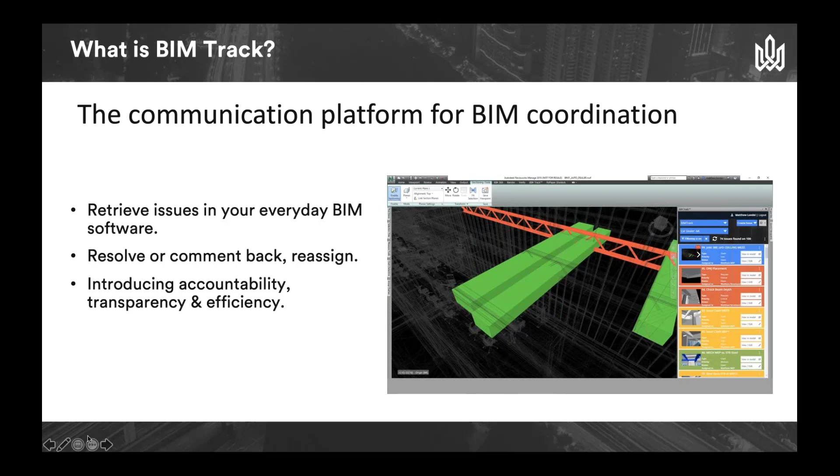BIMTrack allows you to extract and sync that information from your Revit or AutoCAD application into a Power BI interface. The idea is it allows you to connect these tools, from Navisworks to Revit to AutoCAD, Tekla - it doesn't matter what tool in the toolbox you're using. It's agnostic to any one platform and allows you to manage that communication.

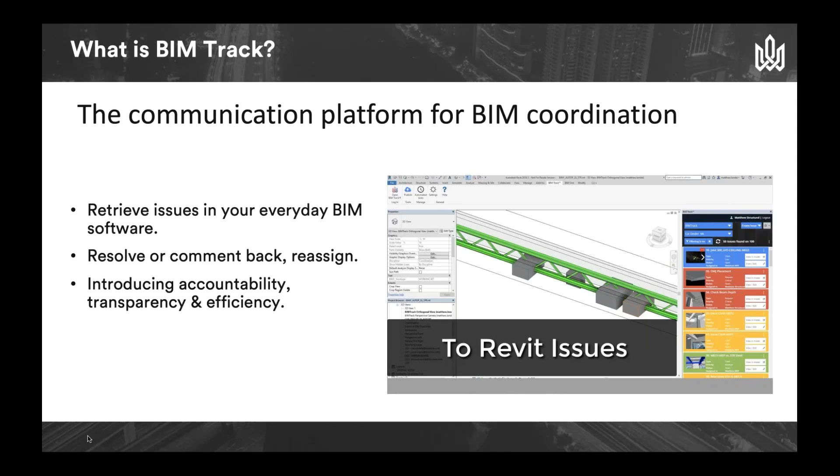Your model management workflow, whether BIM 360, SharePoint, or ProjectWise for drawing or model document management, works fluidly with BIMTrack. BIMTrack is issue management, so model management and issue management working together is a perfect workflow. A lot of the big GCs and architectural firms are using BIMTrack for that reason. I'll talk about metrics and analytics - all the information and communication you're having has attributes to it, like what phase it's in, who it's assigned to, and what zone the issue is in.

I'll show you an example here of how we can create zones within Revit and sync that out to Power BI with issues. So whenever you create an issue, you assign it to an individual, you assign that metadata, the due date.

The mantra of BIMTrack is really transparency, visibility, and accountability. What I mean by that is being able to see what trades are working on. Traditionally, the pain that BIMTrack is solving is that idea where you can't see what your subs or consultants are working on until that next meeting. With BIMTrack, it's connected into that tool, and you can see exactly the stage that people are at with the issues they're working on.

You can track performance and see all those metrics, and drill down deeper into the information. So I could say, I want to see everything that's assigned to the mechanical team based on this zone, based on these individuals, and all the ones that are overdue that the team should be working on.

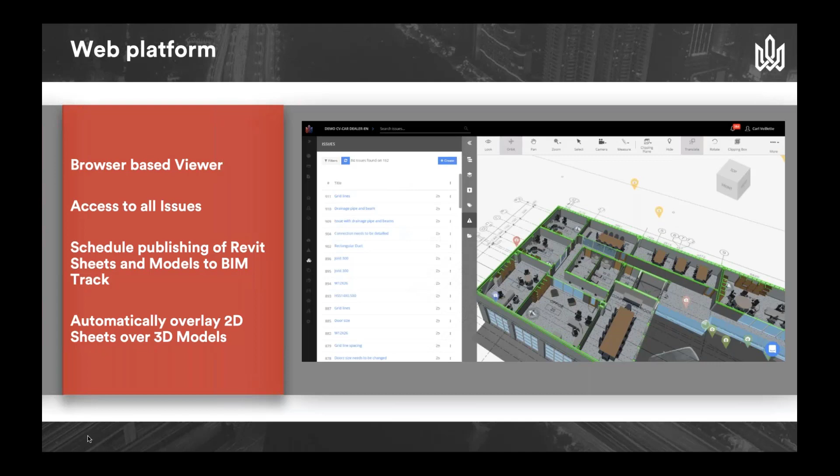As I mentioned before, add-ins, so any AutoCAD-based application platform, so Plant 3D, Civil 3D, HydroCAD, anything that consultants might be using, Revit, Tekla, Navisworks, the list goes on.

So the idea of the add-ins allows you to work in context, as we call it, inside the tool. So if you're an architect using Revit, and you're in Revit 14 hours a day working through your work, you basically have a BIMTrack dialog box open that allows you to work on the issues that are assigned to you.

And the cool thing is view in plan, view in model, navigates you through. So you can imagine inside this building, you can have saved views that will take that user right to where that issue is or that clash is within the model where they need to work on, make the design change, save to central, relinquish the typical process, put their notes in and update.

The integrations, things like Procore or Power BI that I'm going to talk about today, allow you to connect to those solutions. So we have an open API that I'm going to be showing you today that allows you to extract or sync information to and from BIMTrack, to and from Revit.

Related to what we're talking about today is Dynamo and BIMTrack. The interesting thing about Dynamo—I'm no expert myself, but once you get into this you'll see the power of it—is that it's an open API that will allow you to connect. My colleague who authored the API and works with our development team recorded a little video that I'm going to walk you through.

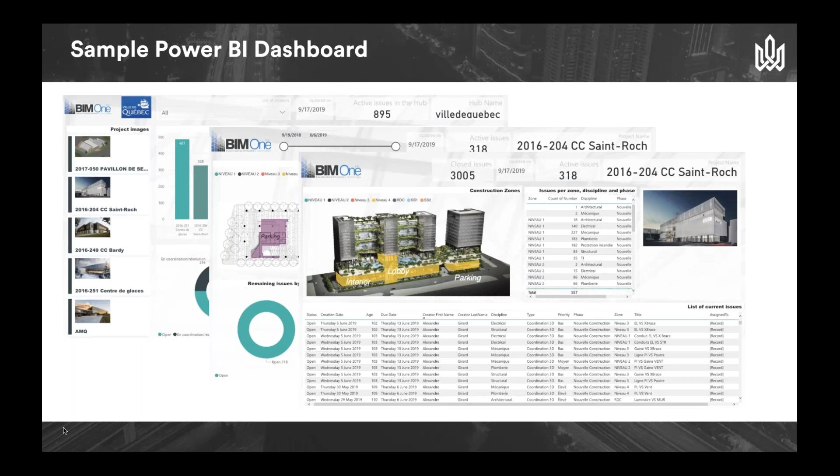Another example here is something like an isometric view, sectioned through with hotspots over the interior lobby. Here are all of the issues in the interior lobby and parking structure—who they're assigned to, what the due date is, and what team they're involved with. This is all real-time data reporting from BIMTrack into a Power BI interface.

As I mentioned, my colleague created a specific example for you, and I'm going to walk through it and share this with you—I've also got his email address for those who want to see how it's put together. He's doing this presentation for BILT Europe, coming up soon. Let me go ahead and play this.

What he's done here is create a Revit plan, and inside that plan he's created issues in all of these rooms based on zones and room numbers. You can see inside Revit the floor plan, and this is the BIMTrack dialog box running inside Revit with the issues assigned to individuals.

The colors indicate a configurable option—you can set colors based on priority, so everything red is critical, everything yellow is high, and so on. You can also set it up based on discipline—say, all architectural red and all structural yellow. It's completely up to you, a visual aid to see what issues you're working on.

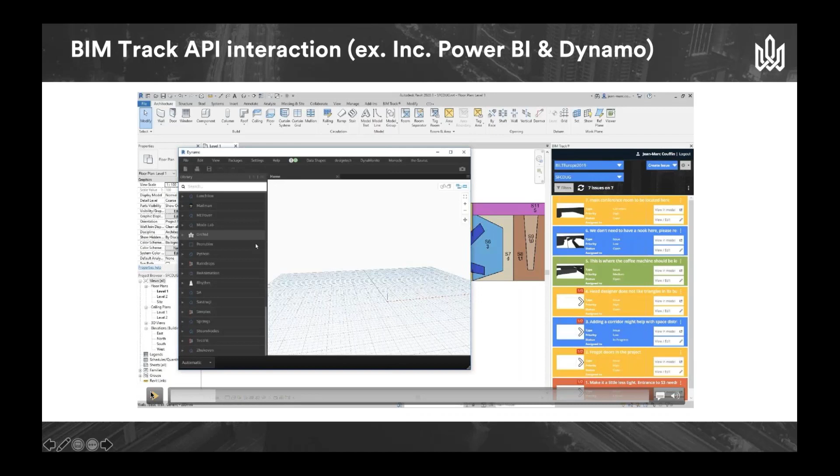The idea is that we've created a project inside Revit, set up some zones and rooms, and created issues in each one. Let's play this through. We want to identify the issues, so we're going to use Dynamo to connect into Revit to extract that information, with the purpose of feeding it and syncing it to a Power BI dashboard.

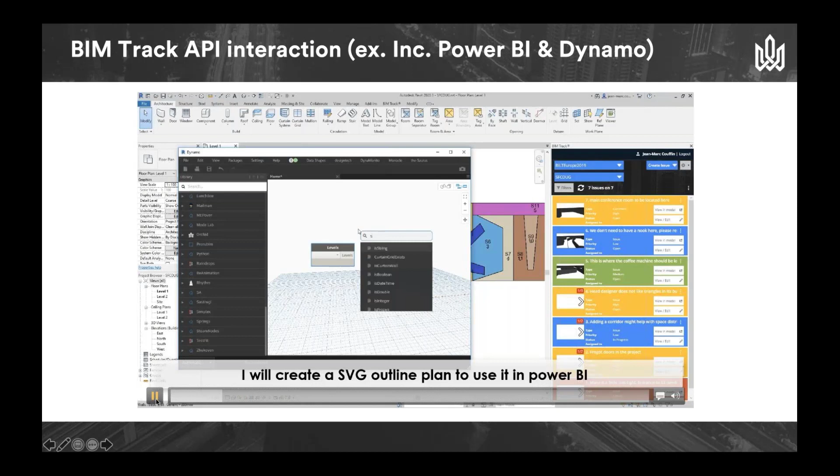So basically he's creating the Dynamo script here to connect to the levels. Going to jump over into Power BI, and I'll back that up right here.

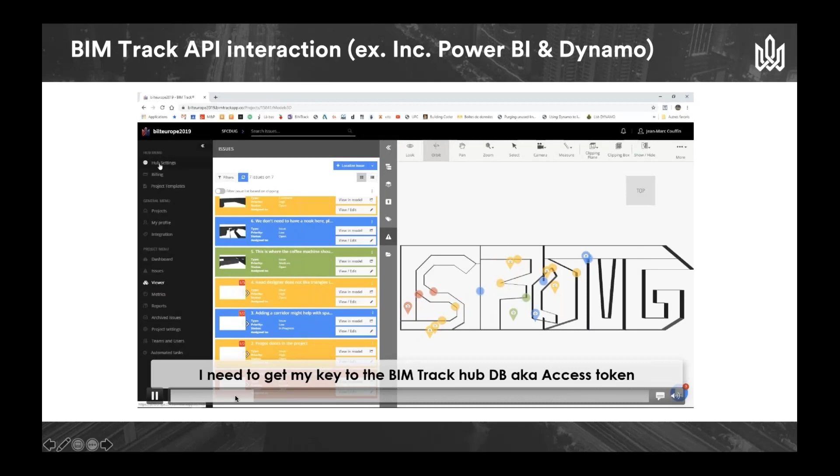We actually have a Power BI toolkit. For those of you that have interest in doing this, there's a Power BI template that we've created. The API is open and freely available to BIMTrack, so for those of you that want to play with this, I'll show you how to get access. There's a little how-to step to do this as well.

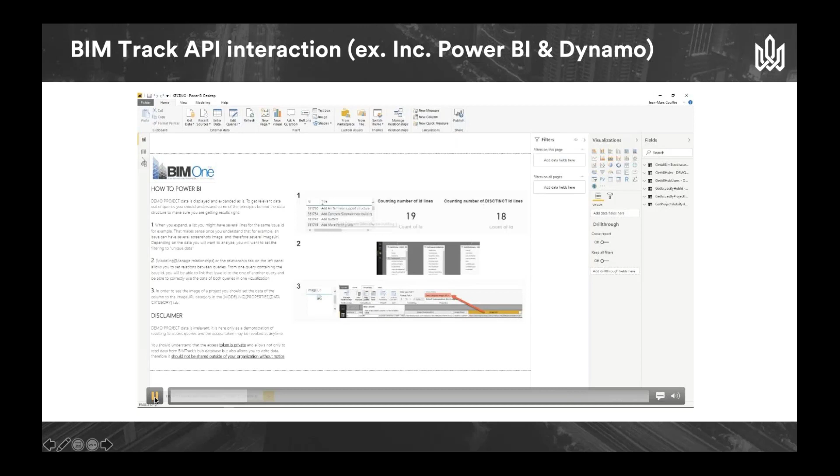So now we're inside of BIMTrack, and basically we're going to do a token request to have access to the API. You grab that, feed that information back into Power BI.

Okay, let's kind of pause there. Okay, hit the forward button.

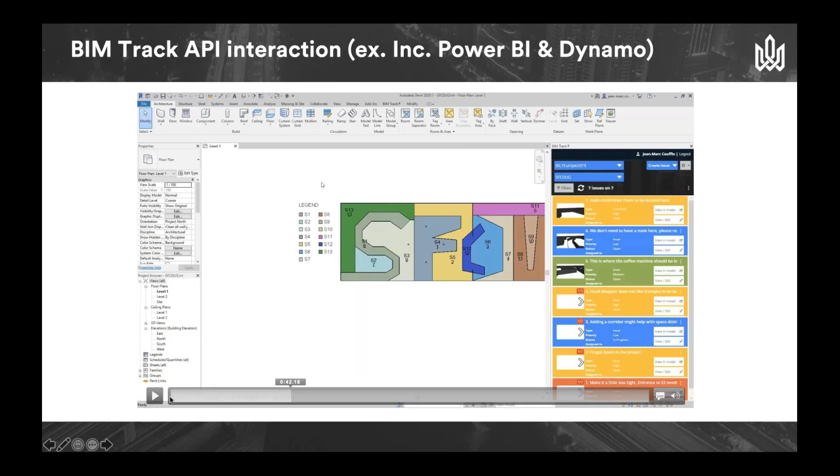So here's the API, and basically all the calls. You have access to all of the hubs, issues, and projects. So you can see here all the kind of call sets.

We told him to try and make this 2 minutes, so he fast forwarded through here, so it's going to go really quick and I'll just mention - basically he's going through the levels and rooms to be able to call that and feed it into Power BI, fast forwarding through it here.

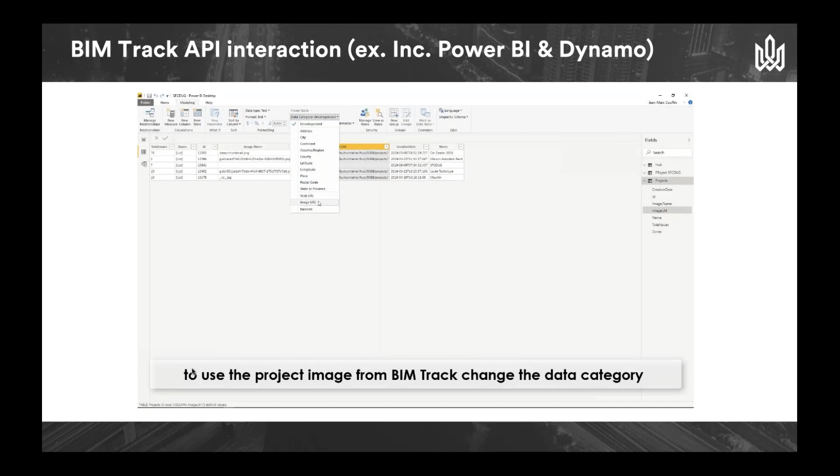Back to Power BI, basically creating the layout of this. Most of the work with creating the Power BI dashboard is not really the connection - the connection is actually pretty easy. It's how do you want the screen to lay out, like I was showing you before with those floor plans and hotspots and things like that. It's usually conversations within your team about how you want that to look that takes the most time. The connection and the layout of it is pretty simple.

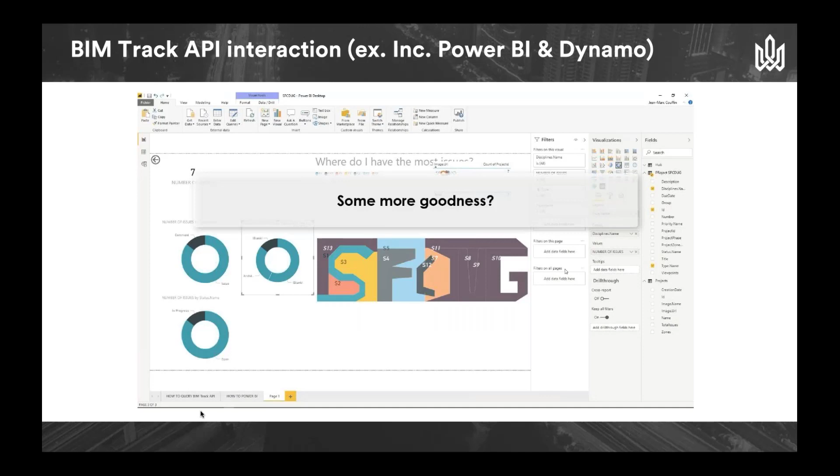But here, basically, there's the Revit floor plan. He's brought in a vector screenshot of that inside of Power BI, and he's creating basically all the connections here between the issues.

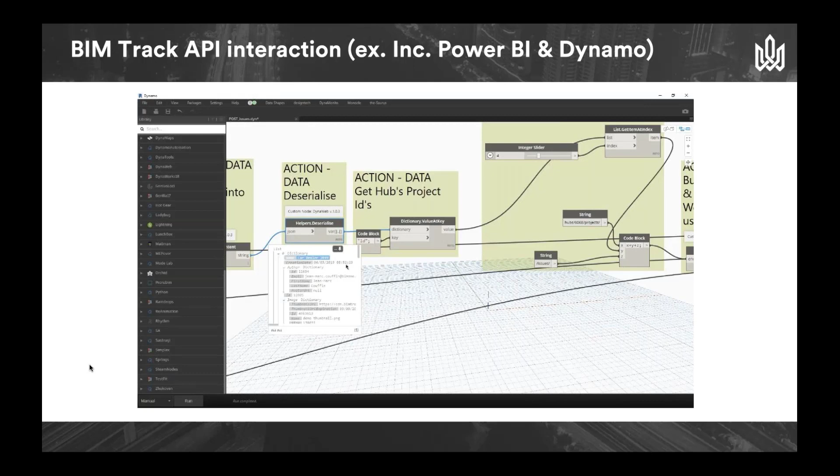We'll make this presentation available after this, so if you want to go back through this, pause it and go through these steps.

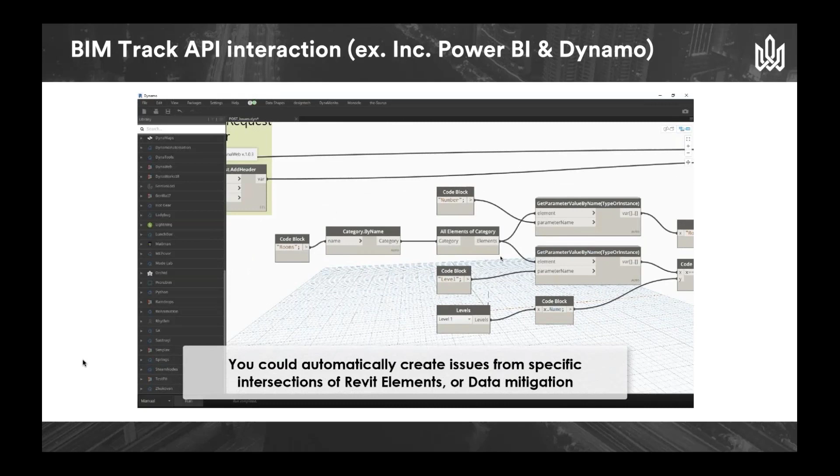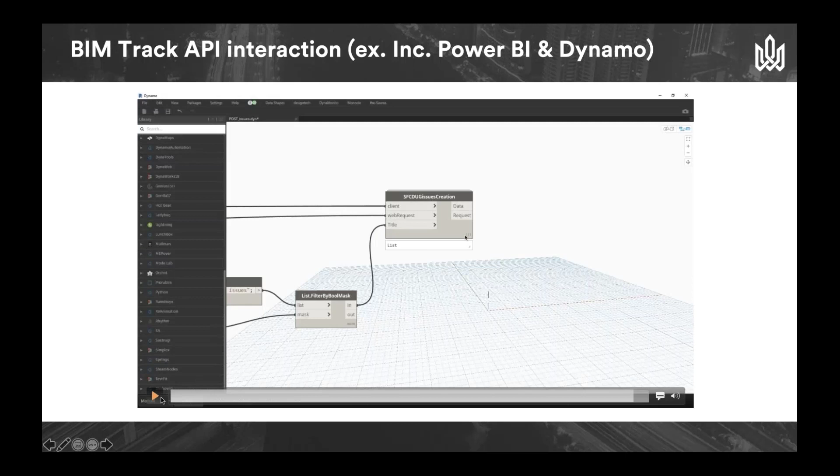And that's basically it. I think that was kind of the end there, right? He was just doing the connection there.

So the idea there is basically just using Dynamo to automate that process, to be able to extract it and also sync it from BIMTrack back into Revit - that's the power of Dynamo. But the example here with Power BI is creating that dashboard that you can share that information out with folks who don't normally have access to that data.

And so that's pretty much it, just wanted a quick little overview of that. My contact information is here. Jean-Marc Couffin is the API developer behind this, and I've included his contact here.

I know he's involved with some of the folks in this group, with some communication with them. He's on the forums as well, feel free to reach out to him - he's the expert on this, so if you have any more technical detailed questions, feel free to reach out to him, or you can contact me and we can set up a call with one of our developers to help out. But again, this is an open API and freely available to allow folks to have access to it.

Okay, any questions, or should we just kind of keep moving along? Yep, we can keep going on. Let's see if there's any questions online - does anyone have any questions?

Is it an Autodesk program? It's not, it's a no - we're a separate company, but we integrate with all the Autodesk tools. We're part of the ADN.

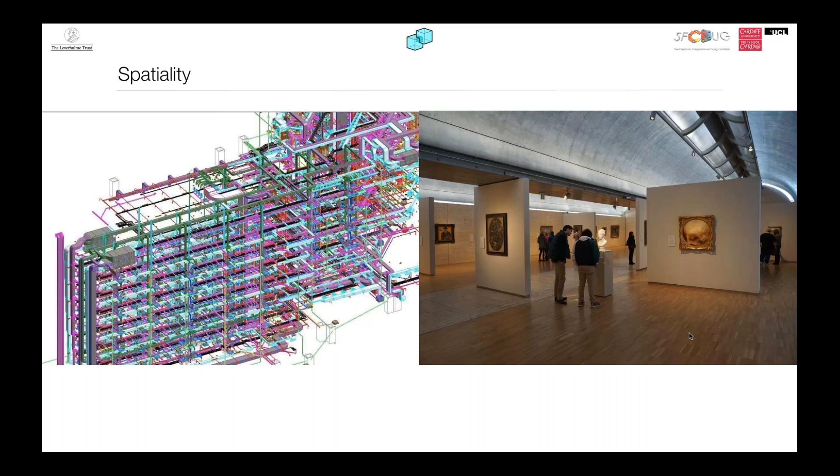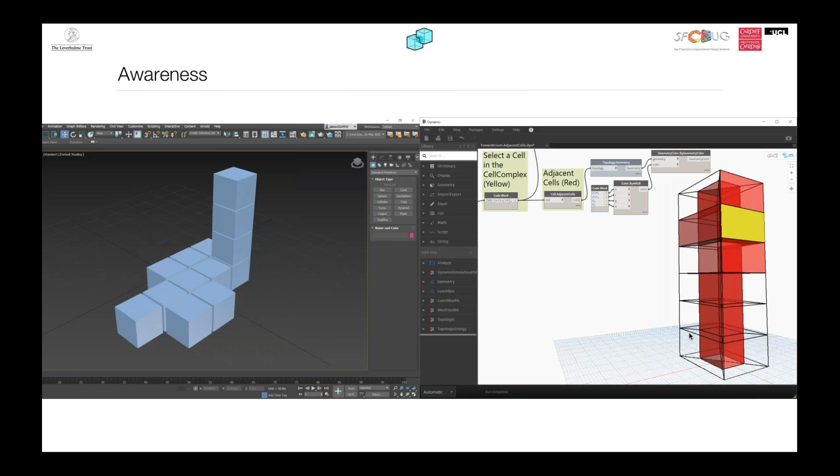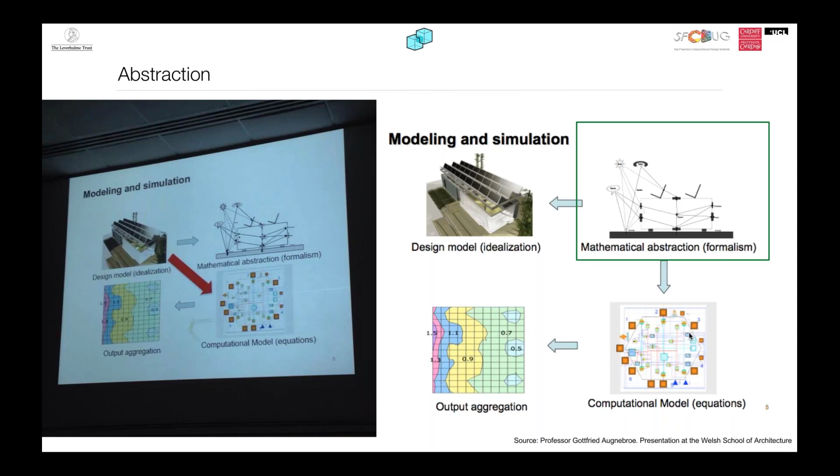So what we want to do is flip the arrow. We don't want to go from BIM to Topologic. We want you to go from Topologic to BIM. But I fully understand that many people have BIM models and they would like to move them to Topologic, and we have some tools to do that. I'll show the work that we've been doing with Buro Happold in particular on that.

The other main idea in Topologic is that if you are aggregating space, you can get into trouble if surfaces do not meet, and you can get duplicate vertices. Sorry, if the sound can be lowered just a little bit. So if you aggregate space, you're going to get these kind of duplicate vertices when you should be doing only one vertex. So Topologic uses the idea of division: you take an overall space and you slice it with planes to create your zones, to create subspaces.

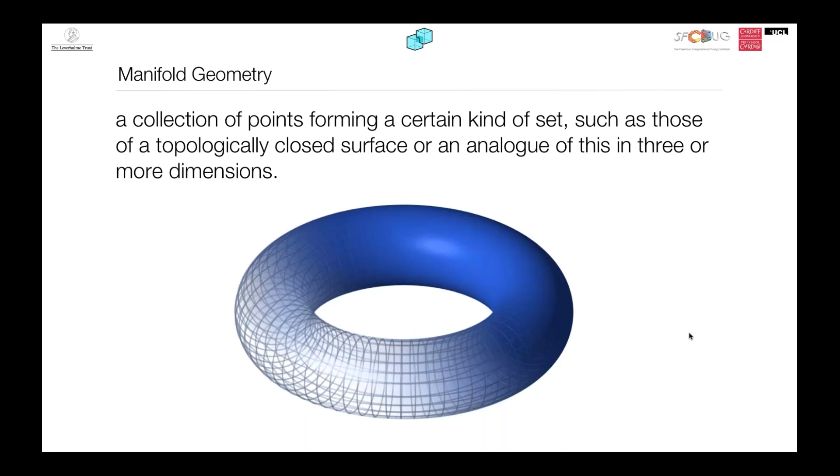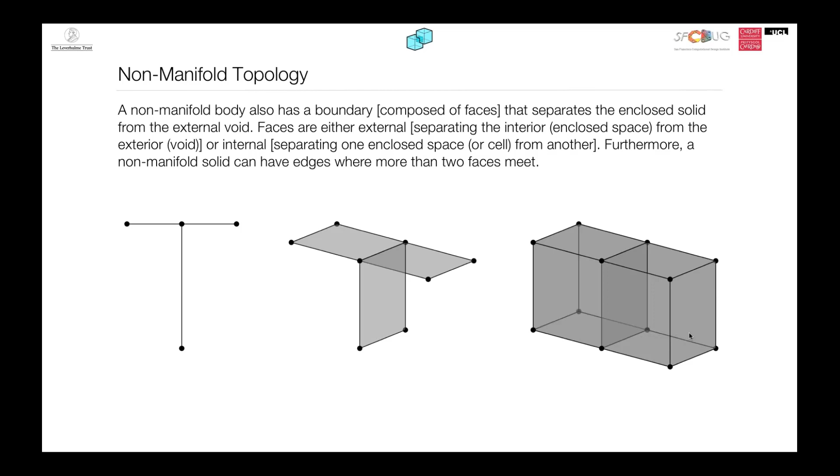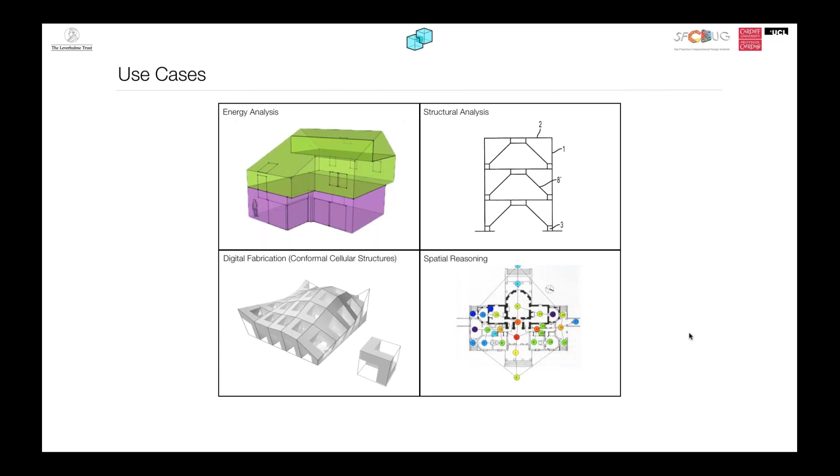So what we propose to Leverhulme is that we are going to use non-manifold topology in four main areas: energy analysis, structural analysis, digital fabrication, and spatial reasoning. I'll go a little bit faster.

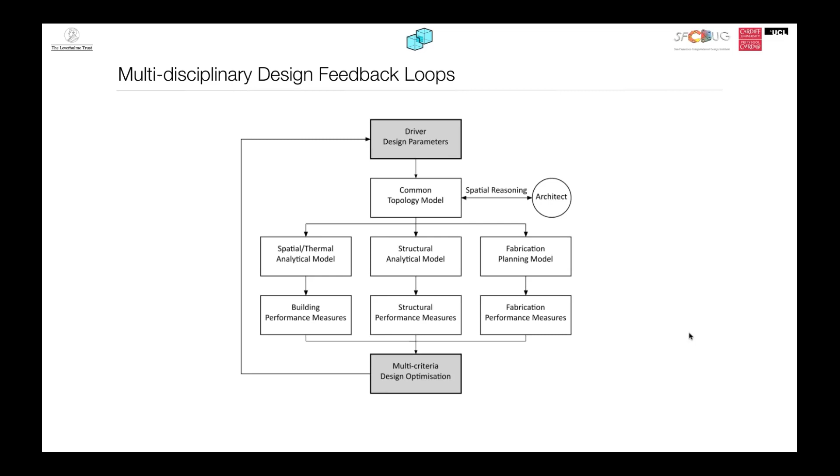Mainly, we want to use a common topology model that is the main model you're working on as a designer, and from that you derive all these analytical models, like thermal, structural, or fabrication planning.

So we invented, after three years, well, it's not really a piece of software, it's more a software development kit. It's really an API, a very large open API, but we've implemented it in several pieces of software so far, and you can download it for free. It's available for free forever, in a way.

So it is open, it's multi-platform, and it's free. It works with Revit and Dynamo alone, or Dynamo for Revit. It works with Grasshopper and Rhino. It works with Buro Happold's BOM, called BHoM, Buildings Habitats Object Model. If you want to take a look at it, it's bhom.xyz. That's also a Grasshopper type of system. And we have a version that is .NET.

So if you're a developer and you want to implement it, let's say for Maya, Unity, or 3ds Max, there's a .NET version you can use to write your own software on top of it.

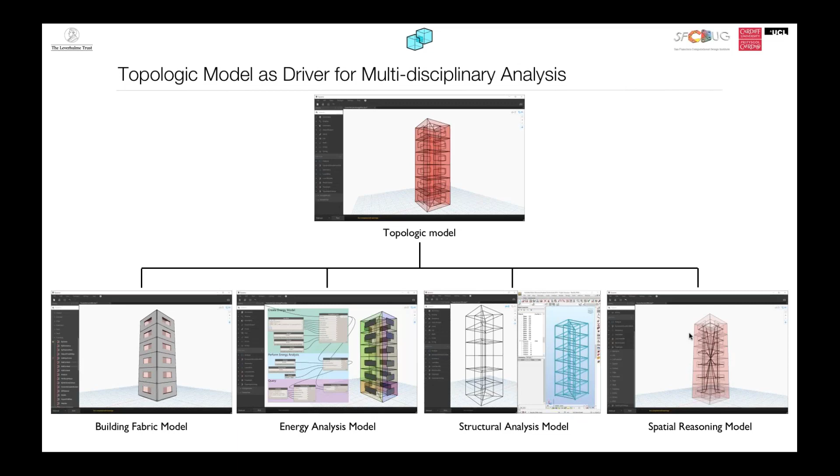So what does it do? It allows you to build this topologic model, and from that you can derive a building fabric model, an energy analysis model, a structural analysis model, or even a spatial reasoning model through dual graph, through graph theory. As I said, you can ask a cell for its adjacencies.

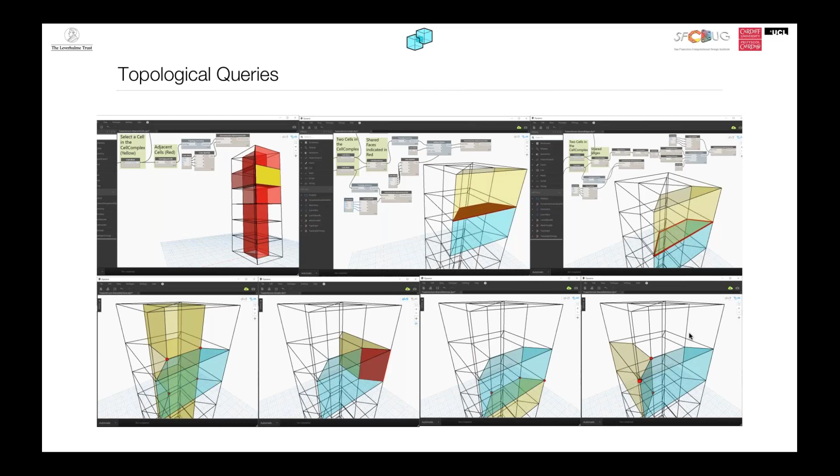You can give it two cells and say, what surfaces do you share? And it says, I have this trapezoid in between, or what edges you share, or what vertices you share. All those spatial topological queries are available in Dynamo. You can just ask questions and it will give you the answer.

It can also do graphs or dual graphs. So you can give it this kind of cell complex of a building and say, give me the dual graph, which, in a simple way, connects the centroids of all the spaces to each other. Then you can say, find me the shortest path from the ground floor all the way up to the 3rd or 4th floor, and it will find the shortest path through it.

You can also assign costs. For example, I'm working with an MEP engineer who wanted ducting to go through a set of spaces and not others. He wanted it to be very expensive to go through an office or conference room, because that's intrusive. So you can assign a cost for going through certain spaces, and that's all done through custom dictionaries.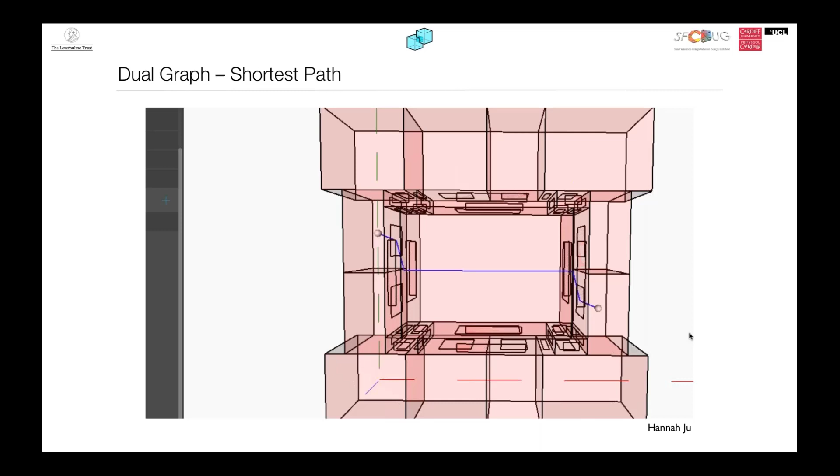This animation might look simple, but what you're looking at is one object—a cell complex in which the elements are very aware of the situation they find themselves in. If a face is an exterior face, it's yellow. If it's an interior face that divides two smaller spaces, like two offices, it's blue. And if it divides a smaller space with a big space, like this big cube that's changing size, it's red.

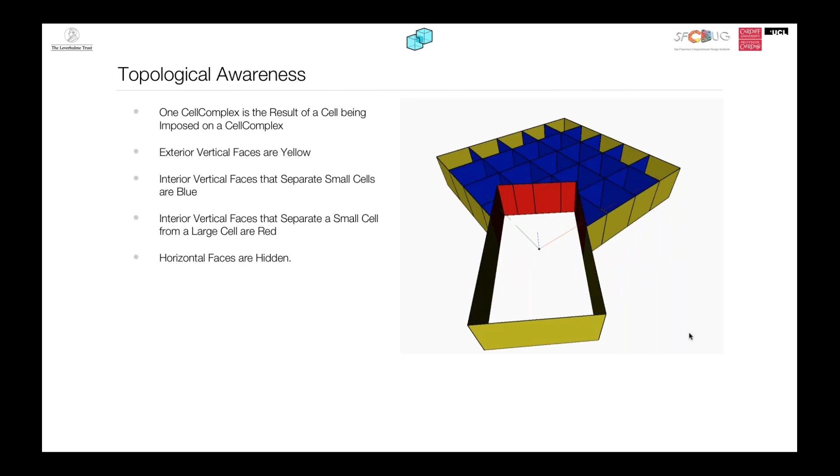We also connected Topologic to OpenStudio and EnergyPlus, and you can do energy analysis now in Dynamo for the first time—I believe it's the first time, at least fully, for free. You don't need Green Building Studio or anything else, or pay for anybody.

You can simply build a cell complex, divide it, and like in this case we're looking for the time where it's not comfortable, whether summer or winter clothes—thermal comfort basically in a tower of some sort. It's not about export and import of files. We have something called TopologicEnergy. Once you hook it all up, it will launch EnergyPlus in the background, give you all the results, and you can color code your spaces based on the results, all done within the Dynamo environment.

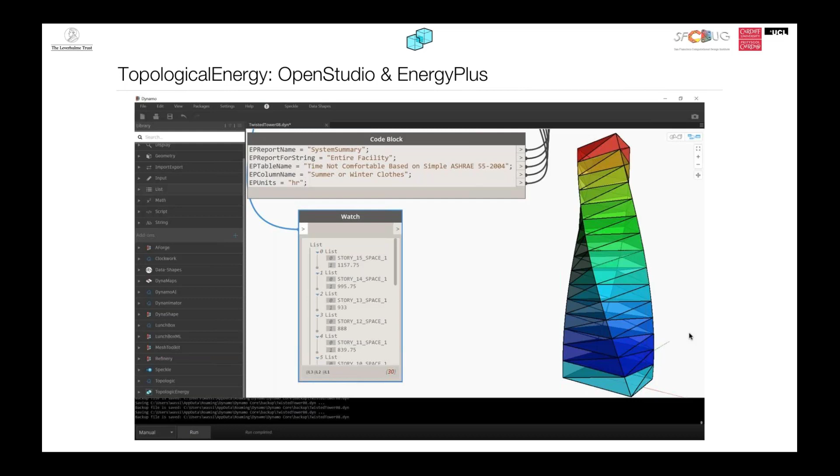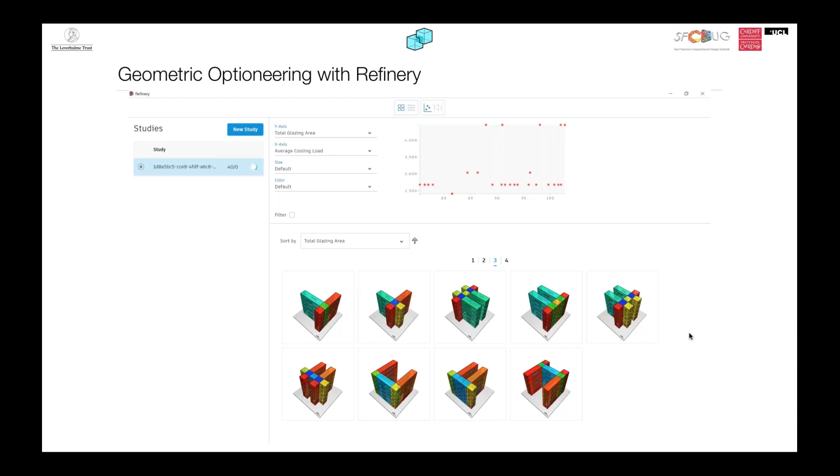We also connected it to Refinery, as mentioned before. In this case, we're trying to minimize the cooling loads as well as maximize the glazing area on a parametric setup, where you have these four building bars moving against each other—you can even erase one of them, that's why you sometimes see three bars. They slide against each other while you try to increase the glazing area and minimize the cooling load, and you can plug this stuff in and do optimization that way. It's fully working with Refinery.

And we are recently linking it to fire simulation. So you can take a cell complex with the apertures and windows and a source of fire, and do a very accurate fire propagation.

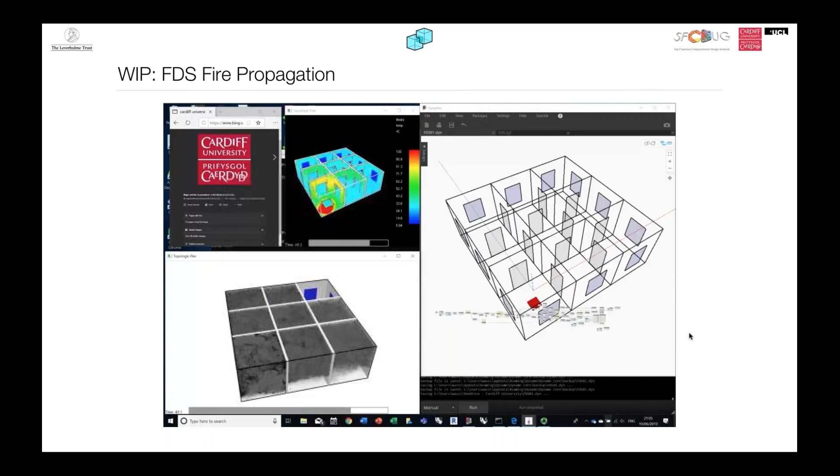We have also connected it to machine learning, part of AI, called reinforcement learning. In this case, we're seeing an agent, this yellow cone, trying to escape a building, trying to find the fire egress, these green spheres, before the fire spreads. And the fire isn't spreading through some abstract model—the data is coming from the fire simulation. We create a fire propagation simulation first in FDS, feed that back into Dynamo, and then ask this agent to try to find the exit and learn how to find it.

Obviously, if it finds the exit quicker, that means you have a good design; if it takes too long, maybe you can improve the design and optimize on that. This is just a screenshot—we brought that sample architectural project from Revit, you probably recognize the building, turned it into a cell complex, lit a fire on the second floor, and put some green spheres for it to find. After a while, after a few iterations, it ducks down to the ground floor. Those dark blue ones are the path—it learns that it needs to go straight down and try to find the exit before the fire engulfs it.

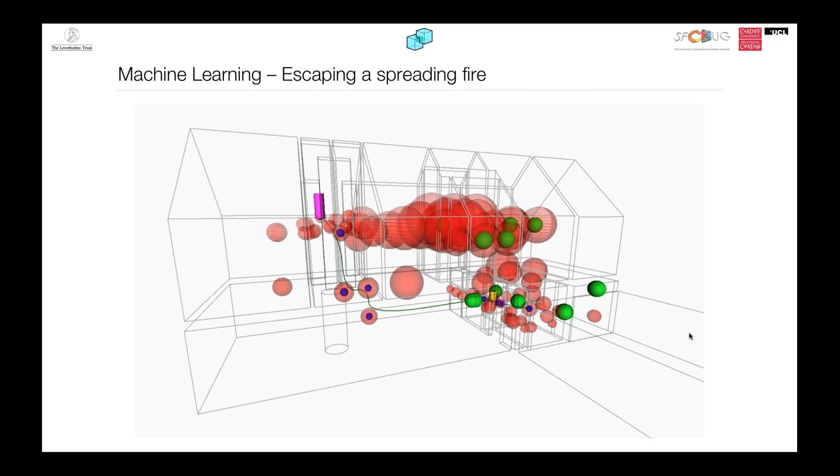I wanted to show this LinkedIn post from Michal Dengusiak from Buro Happold, which we're working with very closely. They had a Revit to GBXML workflow, and since this is Buro Happold, they know what they're doing—yet for a long time that workflow was producing invalid panels. In the latest test, out of about 400 panels, 77 were invalid. Once they incorporated Topologic, they got zero invalid panels, were able to create GBXML, and the simulation ran much, much faster.

So we're really very happy about the impact we're creating on Buro Happold there. We're working very closely with them—they're one of our partners on this.